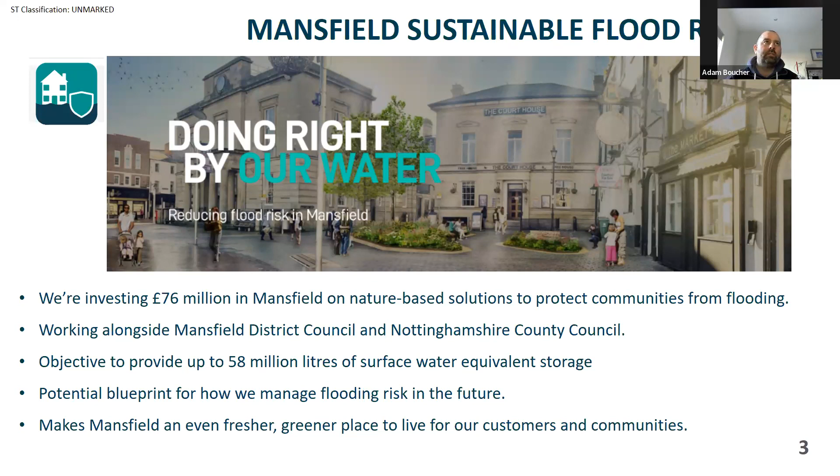Welcome - we're going to give you a bit of introduction. If anybody can't hear or see us, let us know in the chat. Over the next hour we're going to try to answer your questions about potentially the biggest SuDs project ever attempted, and give you background on why it's happening and how we've gone about it so far. We both started on the 1st of October 2022, so we're into our stride now.

The project is part of the Severn Trent Green Recovery Programme, where the regulator asked us to come up with ideas to help with post-pandemic recovery. Our chief exec Liv Garfield put in an extra £565 million bid to be delivered within this current AMP, far bigger than any other submission made by any water company to the Green Recovery request. One of the 6 projects was effectively a trial SuDs project.

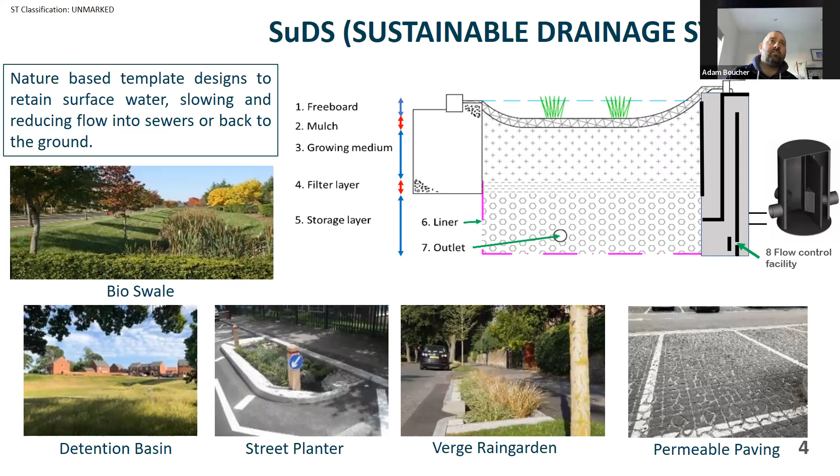We're working alongside Mansfield District Council, the lead planning authority, who also manage the neighbourhood town centre and parks, and Nottinghamshire County Council, the lead local flood authority and highway authority. The objective is to provide network equivalent storage of 58 million litres of surface water - that's 23 Olympic-sized swimming pools in volume - and to develop a blueprint for how we manage flood risk in the future through nature-based solutions.

And the added bonus is obviously we get to make one of our towns, Mansfield, a fresher and greener place to live for our customers and communities.

One of the reasons Mansfield was chosen is combined network. It's got potential for infiltration into ground, and it had this kind of bottom-of-the-bowl overland flow effect as well. And when you add in the current social deprivation within the area, it scored the highest out of all the potential catchments.

Next slide please. So I'm not going to bore you with what a SuDS is, because I think you're probably all on that page. So effectively, we're trying to develop standards of different types of interventions, what I call green to better green solutions. So your bioswale, a long linear V-shaped depression that sits alongside a highway.

And then a detention basin, which is effectively turning open space with a depression, a bit more of a blobby shape, to help us direct that surface water in, slowing it down, reducing the flow of surface water direct to our combined sewers, and trying to get that back to the ground where we can.

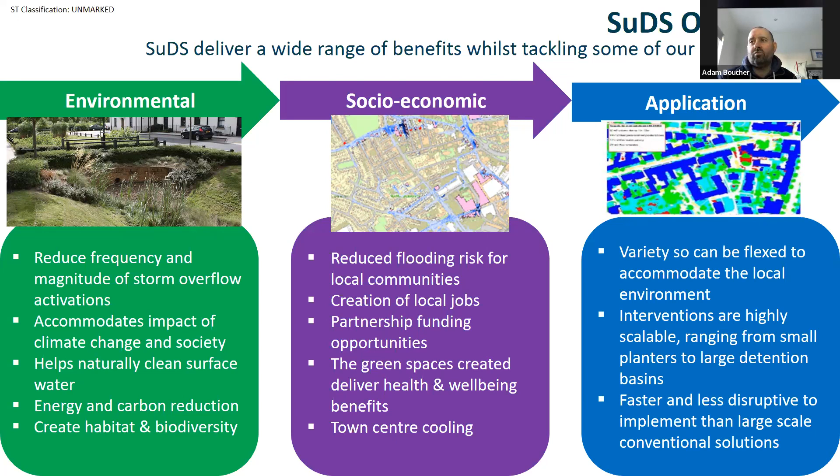So having that permeable paving option for us as part of this trial was very important, because we would come up against a lot of opposition if we hadn't got that, if we wanted to just go everything green, because some of the locations just aren't viable. So we're kind of following the hierarchy of your big green where you can, then your smaller green within your highway areas, and then permeable paving.

We have got tree pits as well within the scope of works, and also we've got an objective to provide some roof drainage as well through downpipe planters or blue-green roof.

So, typical cross section on a SuDS there on the top right, where we've effectively got the different layers - the growing medium, the filter layer, storage layer - and Angus will come on to some detail around what we're trying there with the outlets in a short while. Next slide please.

So obviously a wide range of benefits with SuDS. I'm not going to teach you to suck eggs here, because a lot of you will be aware of those benefits of SuDS, but I think there's a few to focus on for us. Although Mansfield is predominantly about reducing flood risk, we are anticipating a large reduction in frequency and magnitude of storm overflow activations, and that's one of the considerations around how we're targeting different drainage areas and subcatchments to actually give us that additional benefit.

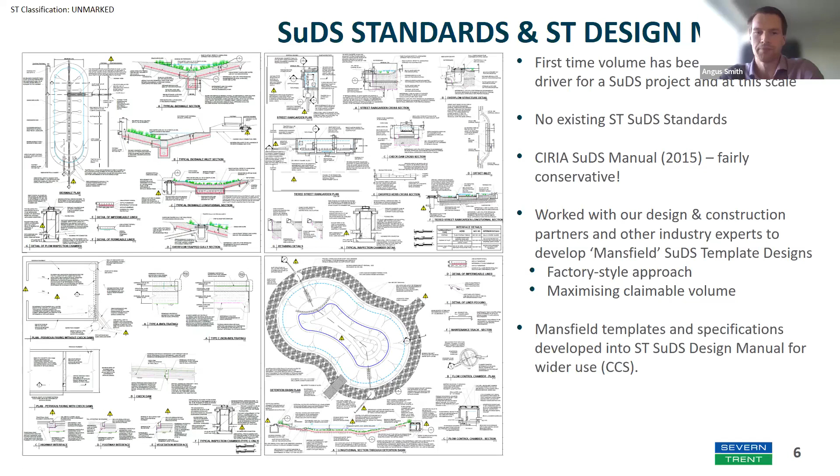That's going to be a massive additional benefit to this project, and something that the DWMP team are focusing on, and we're focusing on with our pre- and post-intervention monitoring as well, to understand what impact we are having in that arena. I think it's fantastic that SuDS really help us to rewind the clock on the impact of climate change and the greater intensity storm events.

But also the way that society, not only the local authorities - I'll show you some examples in a bit - have paved over every verge going and put parking in, but also the way that we've paved over our front gardens as residents as well. And that is very much a focus in Mansfield, where we've got that direct runoff from hard standing, where once there was a front garden and natural turf.

So yeah, we do anticipate some energy and carbon reduction out of Mansfield as well, because the trunk sewer goes into the sewage treatment works, into a terminal pump station - a three-screw pump lift, 1600 litres a second in storm. So hopefully we will reduce some of that by actually being able to infiltrate in some of the areas.

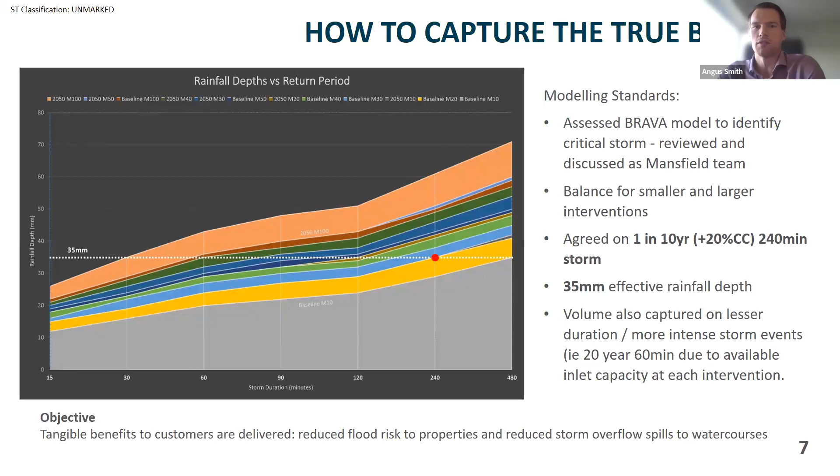On the socioeconomic side, we've spoken a bit about reducing flood risk, but what we are noticing is how it enables us to really create local partnership opportunities that possibly would have been missed as a result of not being able to be quick and nimble in working together.

We've already got 2 or 3 examples with Mansfield District Council, the EA, of actually coming together and putting some funding together a lot quicker than we would traditionally, and being able to do that at pace as well. And I think the other is just the application, really. We're definitely seeing some real wide-ranging scalability benefit, from large detention basins through to small interventions in highway. And potentially some of those could be really fast and nimble as well, and less disruptive than traditional grey solutions.

Okay, next slide, please. Yeah, so we've created these kind of standards, and Angus is going to take us through those. Thank you, Adam. Yeah, so I'm just going to give a quick whiz through some of the technical aspects of trying to deliver SuDs on this sort of scale.

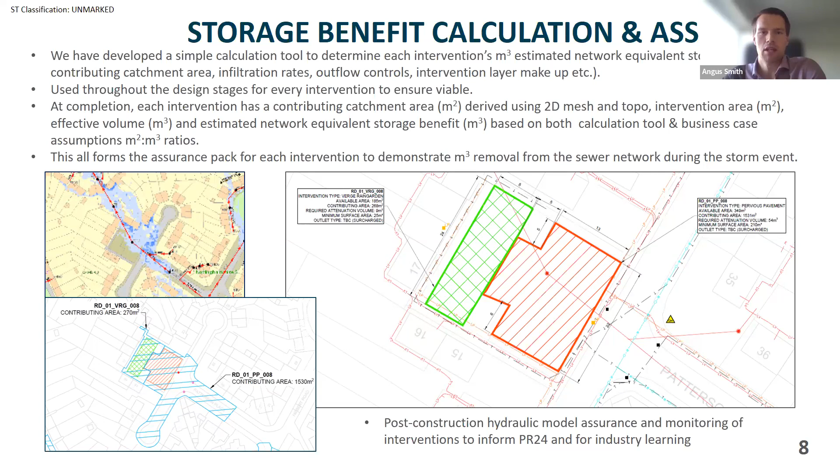So we realised quite quickly and early on in the project, when we were trying to deliver 58,000 cube and thousands of interventions across Mansfield over the next, what is now 2 years, we couldn't individually bespoke design each intervention, because we just don't have the time or even funding to do so. So we had to develop some SuDs standard templates that we could use and kind of drag and drop, almost cookie cutter like, across Mansfield.

It's the first time that volume's really been the primary driver for a SuDs project at this scale. So we needed to adapt existing industry standards to suit volume as the target. We didn't have any existing SuDs standards as Severn Trent. We just referred to the SuDs manual, the CIRIA SuDs manual, which in itself is reasonably conservative on some of the aspects that allow you to store and create volume within the interventions, which I'll talk about in a few minutes.

So yeah, we worked with our design and construction partners and other industry experts to develop what are our Mansfield SuDs templates, to enable that factory style approach and maximise the volume we can get out of each intervention. And these Mansfield templates have then been tweaked a little bit and probably toned down a little bit to form what are now the Severn Trent SuDs manual standards, and they can be used across Severn Trent now on our core project as well, going through into AMP8.

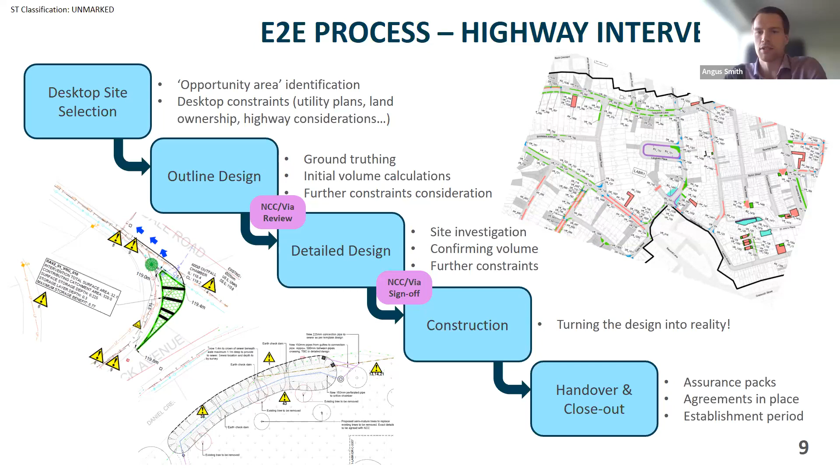So the second bit we realised we needed to sort out pretty early on was how we actually measure benefit. You can't just put some paving in and expect it to give you the maximum volume. So we assessed the Brava model to identify what was the critical storm for Mansfield, and what would give us the most benefit, what our design storm needed to be, and a bit of a balance between the smaller individual highway interventions and those larger detention basin interventions that Adam talked about.

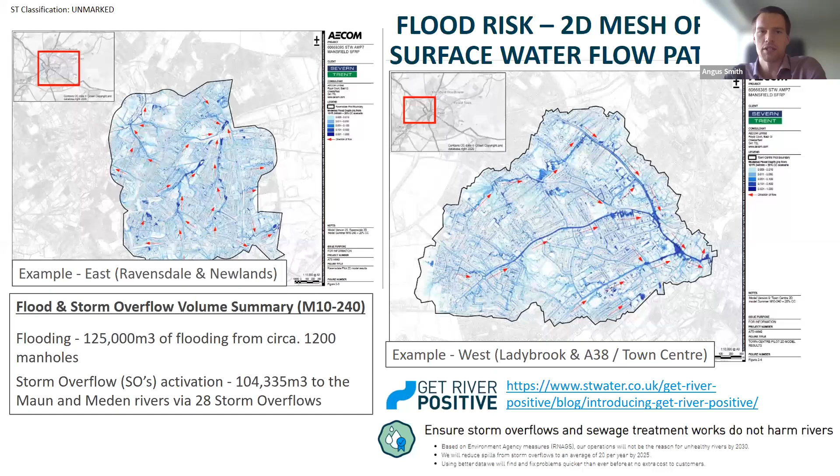So your 1 in 20s, your 1 in 30 storms at shorter durations are also covered, which is really important. Severn Trent typically work to that 1 in 20 and 1 in 30 year for internal and external sewer flooding. So having determined that 35 mil rainfall depth, we've created a simple calculation tool, a spreadsheet based tool that you can input a few parameters about the intervention in the catchment area, and using various material properties and parameters, it gives you a rough and ready number of what volume you can claim from that and what volumetric benefit you get in that design storm.

And it's used throughout the design process, so right from initial concept to prove whether a site is actually worth putting an intervention on, through to detailed design, and then post-construction, the as-built actually confirming, yeah, this is how much volume we've got from it.

Because we don't have the time to individually model each intervention and create a micro drainage model, and do what we would do if we had 10 or 20 years to deliver the project. We probably could do that, but at this scale and pace, we've got to go pretty quickly.

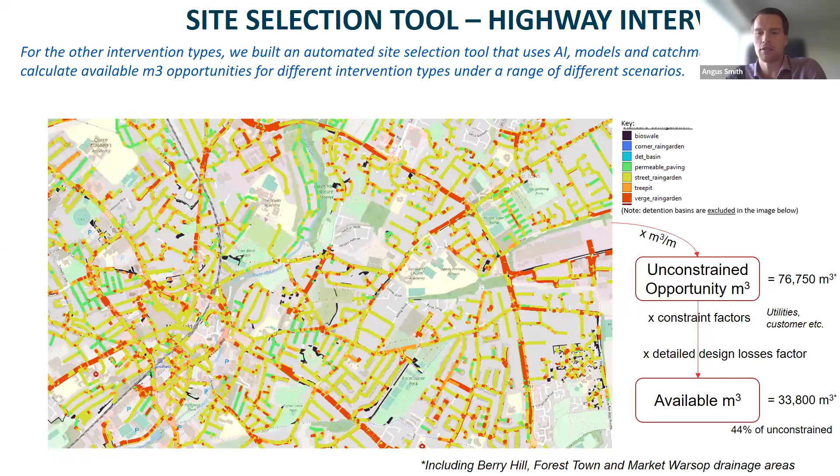But it's not to say we're not doing any hydraulic modelling. There is a post-construction hydraulic model assurance and build that we're doing, which will stretch into AMP8 and post-project, to prove how many meters cubed we think we've taken out of the storm network in our design storm, and then compare that with the model.

Because ultimately, going forwards to prove flooding benefits, we'll need to use the model to confirm that. And all of this learning from Mansfield is also feeding into PR24, the plans for AMP8 and future versions of Mansfield, and tweaking business cases and stuff like that.

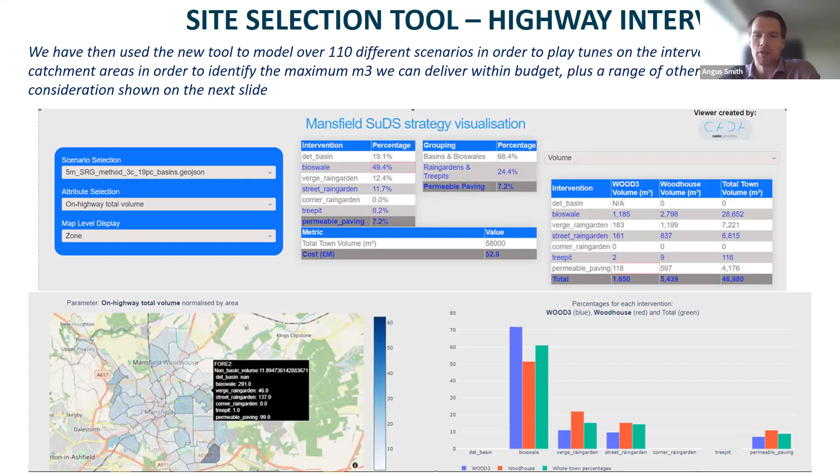So we then need to develop a process. How do you get from every street in Mansfield and every park in Mansfield to actually having some interventions and building them? So we've got this 5-stage process: you start off with a load of desktop data, sitting behind a computer screen looking at different data sets, to figure out going from 100% of areas down to probably 5% of areas that might potentially be viable.

You then do outline design, you go and walk the streets, you actually have a look and see whether the desktop data is completely accurate, or if it says the highway's falling one way and it's actually going the other, and that rules out a few more locations and potential interventions.

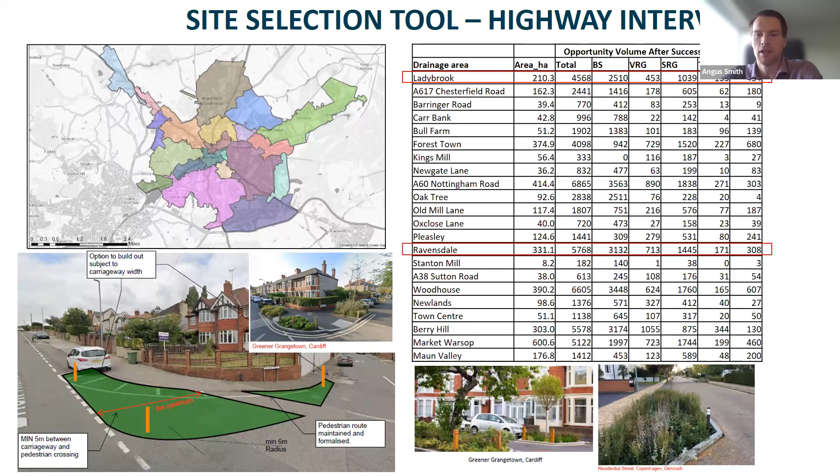You go through detailed design, doing some SI, some topo and infiltration testing to confirm whether we can infiltrate or not, and then obviously go and build it, and then hand over back to Severn Trent or the local authority, depending on what the intervention type is, and close out and get it on our asset database and the monitoring of those interventions going forwards.

And you can see between outline design and detailed design, and then detailed design and construction, there is some interaction with the highway authority. So Nottinghamshire County Council have employed VIA as their highway consultants. So there's various reviews with them, and then a sign off before we can go to construction, to make sure they're happy with what we're building in the highway, and that it meets their standards and what they'd expect to see from a SuDs intervention in the highway.

So we then move on to how we're actually identifying where to put interventions. We've developed a 2D mesh for the whole of Mansfield. This slide shows 2 examples of the catchments we're working in, but this is really to try and target the interventions in locations that will give us significant flooding and also CSO activation reduction benefits.

So from the M10 240 storm, there's currently about 125,000 meters cubed of flooding from about 1,200 manholes, and circa 105,000 meters cubed of sewer overflow spills into the River Maun and Meden. So we're trying to target areas that will give us the most benefit and reduce that volume as much as possible. This is being used by the desktop site selection teams and the outline design teams across Mansfield to prioritise these locations for the interventions.

Alongside that, we've also developed a digital tool to automate some of that desktop site selection. It uses parameters such as highway widths and allowable remaining highway widths when you put an intervention in, looking at existing parking areas that we could pave over and whether any flow would actually fall to it, because there's not much point putting some permeable paving on top of a hill.

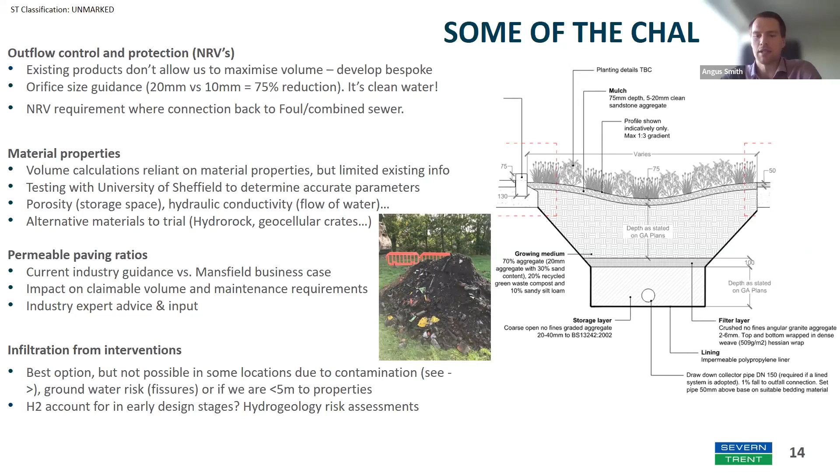The second bit is material properties. We're using lots of different materials, different storage layers and growing mediums, but there's limited existing information on the exact porosities and hydraulic conductivities of those. Because of the sensitivity of the calculations to those numbers, we need to know the exact values. So we've done a lot of testing with the University of Sheffield to determine these parameters, and that's fed into our simple calculation tool.

We're also trialling alternative materials. For the storage layer, in traditional SuDS that's an aggregate-based, coarse open graded aggregate of circa 30 to 35% porosity. There's options for either using recycled plastic crates or what's called Hydrorock, and that gets you up to more than 90, 95, 98% porosity. So for the same excavation area, you can get significantly more water stored within it, and you don't need to dig as deep or as wide. We're trialling some of those on this project as well.

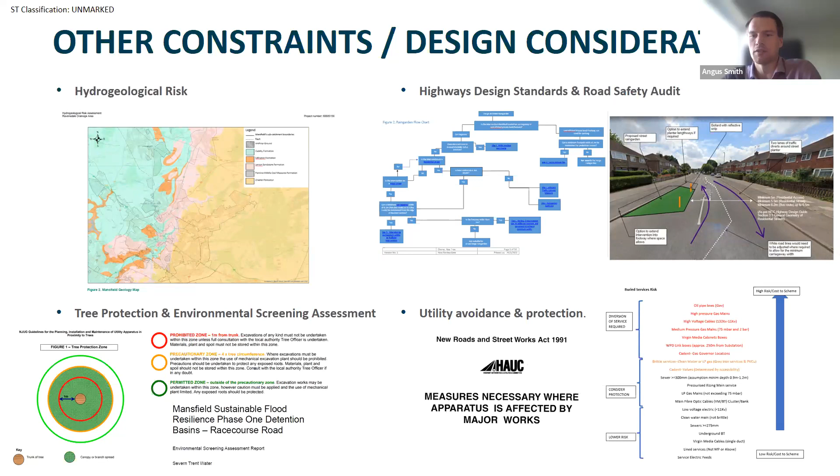Permeable paving ratios - this is around how much catchment area you can drain to an area of permeable paving, and current industry guidance is very limiting on this. It's a 2-to-1 ratio, so essentially for every metre squared of permeable paving you can drain 2 metres squared of impermeable area to it, but that doesn't really allow us to maximise the area and volume created by that permeable paving. So we're pushing the boundaries on that and doing a lot of investigation and testing, which will hopefully inform future updates to the CIRIA SuDS manual, which is ongoing at the moment, and push that guidance to really make SuDS work for water companies, because volume is one of the primary benefits to the water company. We've had a lot of industry expertise and advice and input on the parameters we're looking to push, because we're not just going for it and hoping - there's a lot of expertise and knowledge being input into the project to guide and steer us in the right direction.

And then the last bit on here is around infiltration. So obviously we want to infiltrate where we can. It's the best option. It doesn't only take the water out of the sewer network temporarily, it keeps it out permanently, and also has wider benefits such as recharging groundwater storage and the aquifers.

It's not possible in some locations, either due to proximity to properties. So if you're within 5 metres, then it's in contravention of building regs.

Also there's some locations around Mansfield where there's unlicensed and unrecorded tips and older contaminated land from previous land uses. The picture in the middle of the screen was, according to our records, a nice greenfield site, and we went and did some site investigation and found a load of older contaminated land and material from an old tip. So we can't infiltrate through that because it risks washing contaminants down into groundwater and the aquifers. But the difficulty is how you account for this in early design, because without going and doing site investigation on every single site, you don't know what's beneath ground despite all the records we have.

So we're doing some hydrogeological risk assessments across Mansfield to identify as much as we can and make a bit of a generic plan of where's going to be good for infiltration across Mansfield and where isn't.

So some of the other constraints and design considerations we're facing into. Hydrogeology, following on from what I was just saying, Mansfield is almost split north to south by two different underlying geology types. On the east side is more of a sandstone, so it's very good for infiltration. On the west side is more clay limestone, so it's not as good, but it still has pockets where it is good for infiltration. That's all feeding into those hydrogeological risk assessments for the whole of Mansfield, which will then guide intervention locations going forwards.

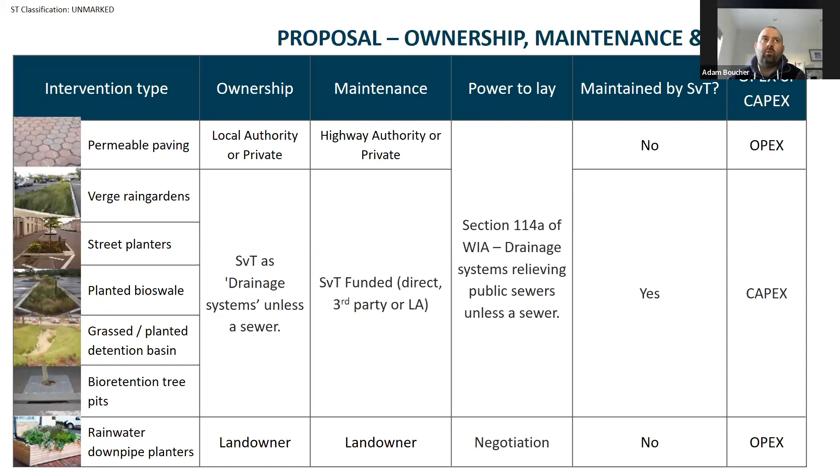So just on the ownership piece, just to be clear, as a trial for Mansfield, Severn Trent are being allowed to capitalise effectively the green assets, the verge rain gardens, the street planters, the bioswales, any basins and any tree pits. So we are being allowed to capitalise them, but it's only under the trial. Effectively, it's been quite an easy discussion with local authorities. They certainly sat there with their arms crossed at the beginning and said who's going to look after all this, and we said we are.

They are going to be built under Section 114a of the Water Industry Act, which allows water companies to intercept others' water, or the surface water entering the public sewage system, and they will be constructed as drainage systems unless they are a sewer.

And we are therefore directly funding that maintenance, because as we can capitalise them, we can add them to our asset base and therefore add them to future AMPs for maintenance cost. But that is only under this trial, so it will be interesting how the regulator sees this working. The trial and its output will be fundamental to see if we can do this at pace, and therefore whether this is the way of unlocking future maintenance and operability of SuDs within the network to help relieve sewage networks.

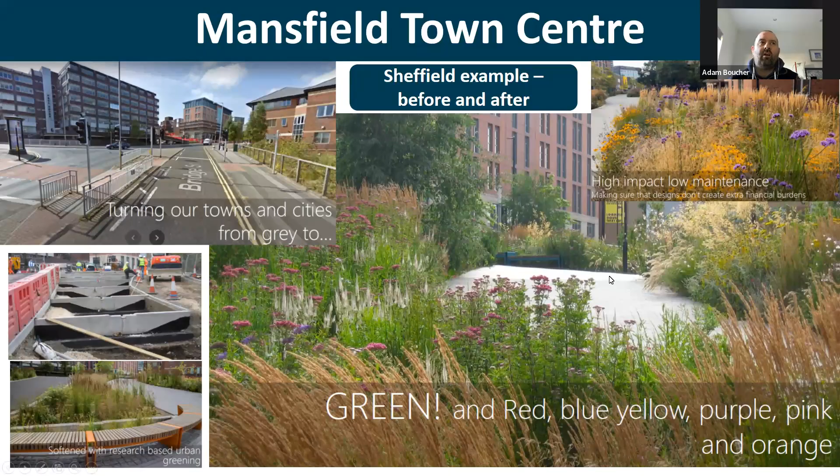One of my frustrations coming into the project is that I don't think there's been enough shared around the industry on what people have actually done from SuDs. I open the magazine and regularly see, yeah, this is happening down in such and such, but the technical standards and pushing forward some of the CIRIA guidance to the next stage is certainly an opportunity that we must take off the back of Mansfield and share with the industry.

So I just wanted to make that point.

Next slide, please. Really, finally, I just wanted to touch on what's happening out in the field at the moment, and a bit of a prelude to hopefully some of you coming up and seeing for yourself what's going on in Mansfield. The ambition really was, when we first got this project, we went up to Sheffield to see the Grey to Green project there.

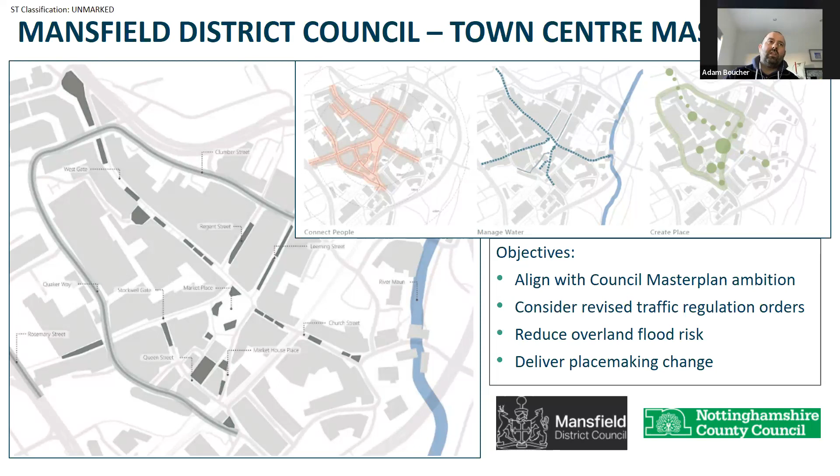It was very much a transformational project around an area between the railway station and the city centre, on the edge of the ring road, top left corner. You can see there a very 70s ring road layout, almost identical but on a smaller scale to Mansfield, where car was king.

What they've managed to do up there, with a scheme over 3 phases now - the first 2 phases were about £8 million - was to get verge rain gardens in on quite wide streets, reduce the existing road down to a minimum 2-way traffic, and take all the white lining out. You can see on the bottom left photos here how they've done that, providing excellent verge rain gardens within the middle section, and then a pedestrian and cycle lane to the outside, effectively making car not king.

We actually took some Nottinghamshire County Council highway officers and some Mansfield District Council planning officers up to Sheffield and showed them what had actually been done. They've got no curbs and no white lining, and there was definitely some concern around: we can't have this in Nottinghamshire, we'll have cars in the verge rain gardens, and we'll have cyclists just driving off the edge of curbs into the rain gardens. So we took Sheffield City Council out with us.

We paid for them to attend the visit and show us around, and effectively they allayed some of those fears by saying we've had no accidents. Actually, when you look at the traffic now as you come off the main ring road in Sheffield into these areas, the speed - cars are literally crawling, doing 22 miles an hour in this area. So that was one of the ambitions we wanted to take into Mansfield, to create that kind of environment.

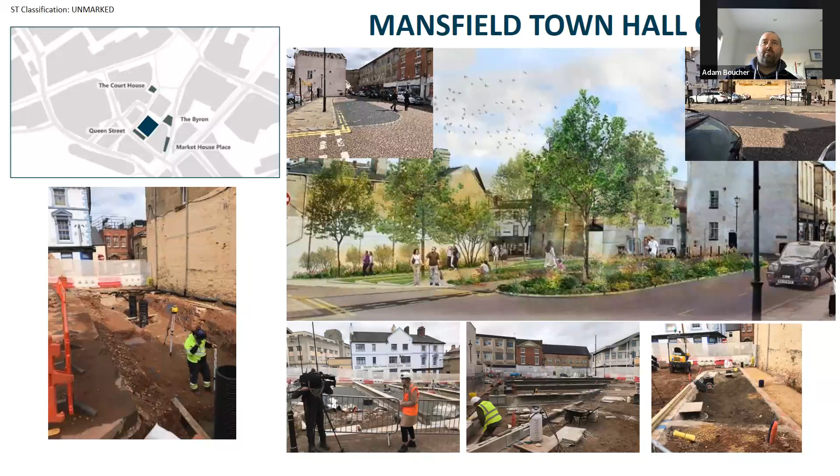Next slide, please, Angus. So in Mansfield town centre, the project actually coincided with a couple of things. Mansfield District Council had some ambition themselves and a little bit of funding, and they were also going through consultation on their revised master plan, which was based on connecting people and placemaking.

So we plugged this managing of flood risk in the middle of that and said we're aligning here. We had a bit of a great ambition for this Quaker Way that runs around the outside of the pedestrianised town centre and marketplace - it's like an inner ring road, similar to the one shown in Sheffield, like a dual carriageway racetrack. It's a very big, wide barrier that keeps pedestrians and cars very separated at the moment, and it is a bit of a barrier for people getting into the town centre. So it's something Mansfield are looking at as part of their master plan ambition.

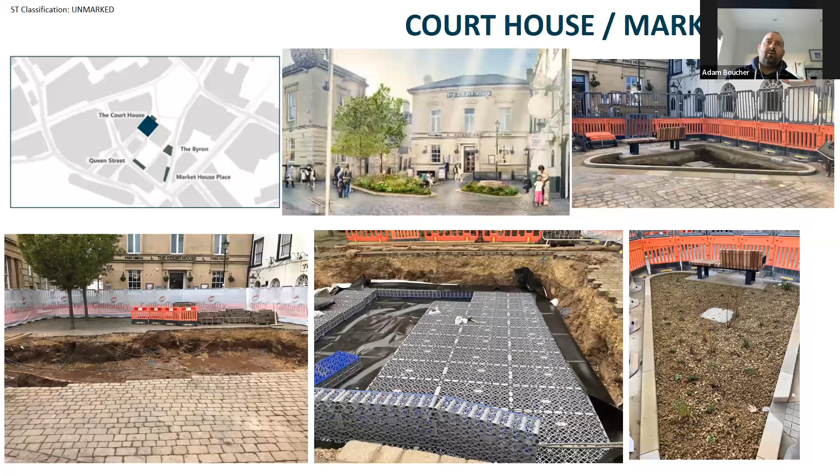We said, is there an area here with lots of opportunity? Our original ambition was to do probably 10% of the funding within the town centre and the volume because of the flood risk existing there. We said, is there an area we can get on with independently to your master plan, because obviously that's tied up with traffic regulation orders and revised highway layouts, etc.

If you move on to the next slide, Angus, please. The area around the town hall was the area we were given. They said they were going to do something with the car park, which you can see top right hand side - it's 600 square meters. It was actually the old indoor market, which was knocked down and a car park put in place. You can just see that old loading bay with the dock blocks for the old indoor market on the outside in the highway.

So we looked at what they were planning to do, which was effectively a cascading turfed seating area, and that's all they were looking to do.

We said, well, we think we could feed in quite a bit of surface water here. Would you be happy for 2 of these bays within your area to become verge rain gardens? And are you doing anything with the entrance? They said no. We said, well, if there's no services in there, we think we can get a lot of surface water to that area and make that a verge rain garden as well, effectively making that a border to your site.

Behind the taxi to the right is actually the brand new bus station. We've got a huge site there with about 1,500 square meters of surface water landing in this highway area surrounding the site, and from the bus station roof and some of the hard standing, which comes off its own surface water system and then drops straight into our combined sewer outside this area. So we've diverted that, and now we're feeding all that surface water directly into this new installation.

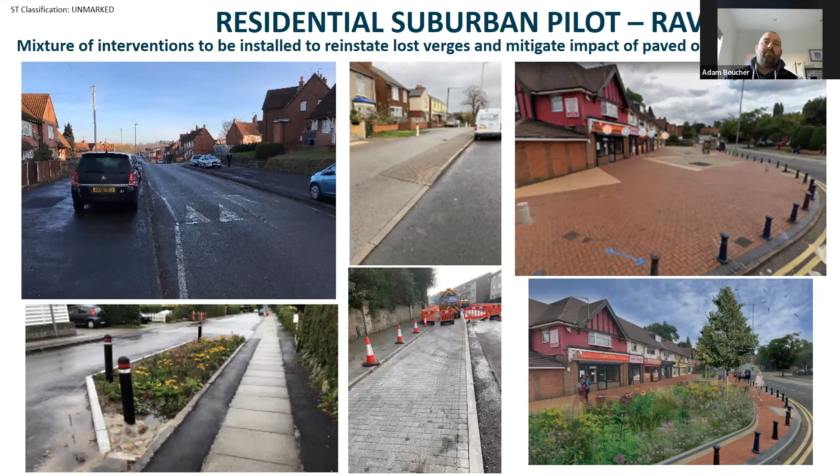And then at the front of the town hall area, to the side, we've got this area called Courthouse - the old courthouse. It's now Wetherspoons, because all buildings like this are Wetherspoons, aren't they? So the town hall at the side of it, and again, we've fed surface water in as it comes down the hill from the site at the rear.

You can see large excavation, large geocellular storage, as Angus said, which gives us a high void ratio here. Also, because we're not putting vehicular loading on these locations, that gives you the opportunity to use that instead of granular material. What sits on top is effectively a big gully, feeding that water in. You can see the inlets on the new seating arrangements are actually inlets into these areas.

And that's now been planted. So we've got a couple of verge rain gardens here that are similar to the artist's impression on the centre, and they'll take over the next 18 months now. Next slide, please.

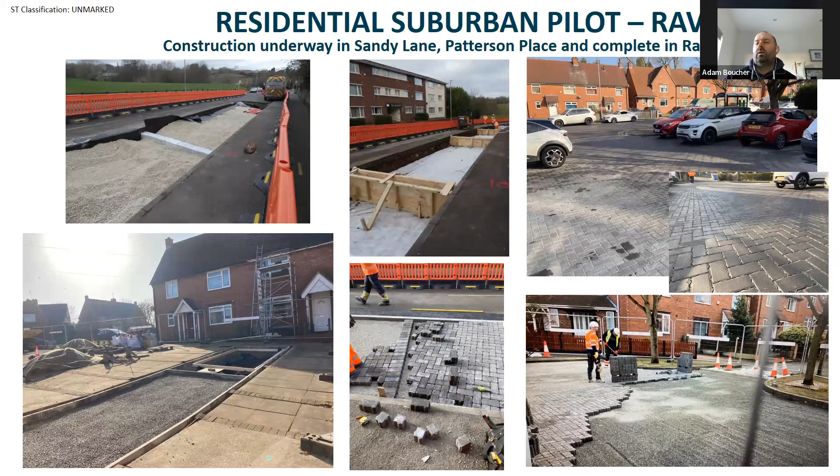It's a bit different in the suburban areas. So we've trialled an area called Ravensdale, the first of those drainage catchments that Angus showed you. And again, you can see some of the impact of society.

We actually walked around one of the drainage areas with the local councillor, and it was a very similar scene to the top left corner. She was incredibly proud that she'd used her councillor funding to tarmac over all the verges that had become unsightly because people who didn't have drives were now parking on them. She asked me whether we're not going to be digging up her tarmac, are we? I said, yes, we are, where we can, but we're going to be mindful of the capacity and need for parking as well, and we'll do permeable paving. She was absolutely mortified that her nice tarmac is coming up, and saw nothing wrong at all in what she instructed the local authority to do by tarmacking over those verges in the first place.

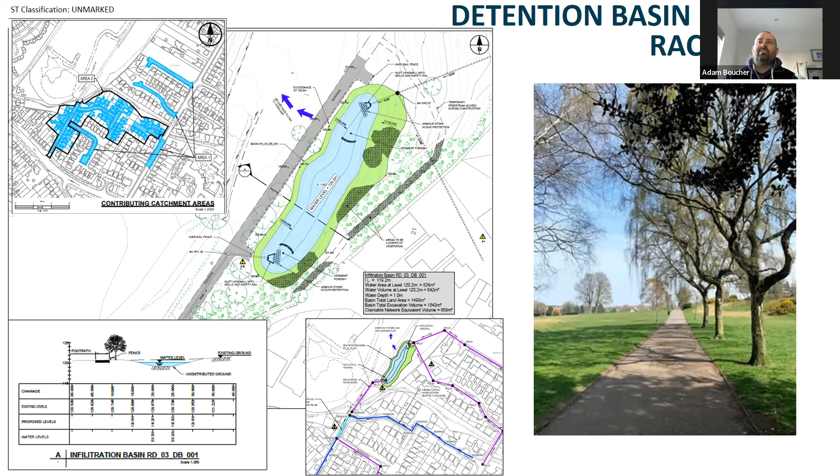So this gives you an insight into some of the battles we've got as an industry going forward. But you can see in Mansfield, there's just endless examples of verges being taken out. You can see that middle top one - they've paved over what was a verge with block paving, just to cut down on maintenance. The shops to the right - when you look back at the 50s, 60s plans, this was the entire green area in front of the shops with a walkway through it. Over the years, local authorities just paved over it, and even the trees that were there at one point have been tarmacked over.

So what we're trying to do now, we're just in the process - this one's actually under construction. We're just digging down to the storage layer at the moment. You can see the artist's impression of the two verge rain gardens we're putting in there, that are going to provide about 80 meters cubed of storage from runoff and the surrounding contributing area. So that one's under construction.

And then on the bottom central one, you can see this is just outside of a school, where the road is kind of wide enough for 3 lanes, and we've got parking bays, which are formal bays now for the school run traffic.

These are really great opportunities where you get long linear walls with no drives. The properties are actually served by a service road behind, and this is where you can effectively work in isolation and get stuff in without disturbance, because it's a free hit. You're not disturbing anybody. But this does go up and around the corner, and we've had it across drives as well.

You can see on this photo the granular storage layer bays going in, the check dams, because we've got a gradient there, so you're looking to utilize that. Then you can see some of the paving down. These are some of the parking areas we spoke about, top right hand, which are Mansfield District Council tenancy communal parking areas. These are really good opportunities and cost effective, because you're doing a larger area compared to the road ones, where you might have check dams or you're interfacing with traffic, so much more traffic management. You can see the granular layer, and then this binding layer laid on the bottom right hand photo before the blocking starts, this permeable binding layer.